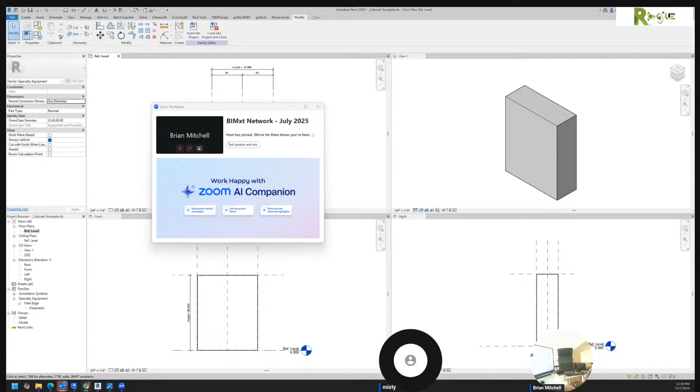I'm actually going to be building a very interesting family. I'm just talking right now before the meeting starts. I don't know if you can see this little tiny wheel right here. They say they're going to let me in whenever they start it, so it must start exactly on time. But after they finish up, we're going to try to build this thing here, which is a rather interesting situation that I think could be very beneficial for us.

Looks like we're starting, recording in progress. Were you able to hear it say recording in progress? I would imagine the two guys with the cameras are who we're going to be hearing. I don't have a way to check the volume, so once they start talking, you've got to tell me if you can hear it or not. I might be able to adjust it a little, but I don't think I can. Let's see what happens, she should probably start talking. So I'll put my thumbs up if I can hear it, okay? If you don't see me, you can just chime in and say I can hear it. Just unmute and say I can hear it when you hear them talking. They're not talking yet.

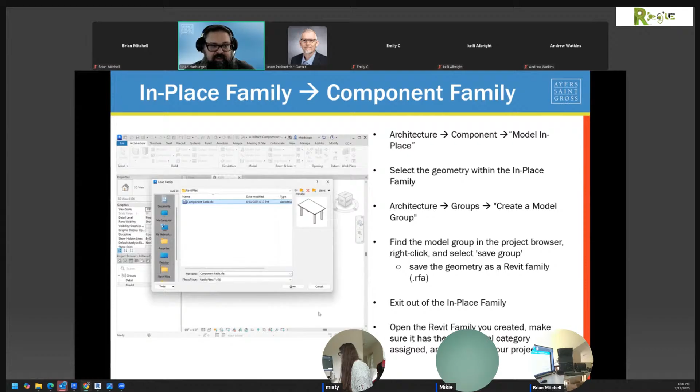So: architecture, component, load a component, component table. And it's going to be identical to the in-place family you made because you copied and pasted the geometry. But unlike the in-place family, you're not creating all these duplicate families in your browser as you move it around, because that's how families work.

So there you go. That's terrible. I can do 10 times better than that. I can't believe that's even a solution.

Families where you have set the family parameter to cut with voids when loaded - we'll cover that. So there's a couple things here to talk about.

We all know that there's wall-hosted families, ceiling-hosted, floor-hosted, and one of the problems with those types of elements is, one, it can only host to one element. So in the example below with this corner window, sure, we can use a curtain wall and approximate a curtain window. But if you're trying to place a product in, like any other window in your building, and you want it to cut multiple walls, a wall-hosted family or a face-hosted family can only cut that one host element.

That's incorrect - you use a work plane based family and set cut with voids when loaded, and you have a void in your family. Anything in the model can then be cut with the void from that family.

So the example I'm going to give here is lights. Most projects have like thousands of these throughout. And every single instance of a can light, if you're doing it ceiling hosted or face hosted, is likely cutting a hole in your ceiling. And that's a ton of extra geometry that you don't really need in your model for most places.

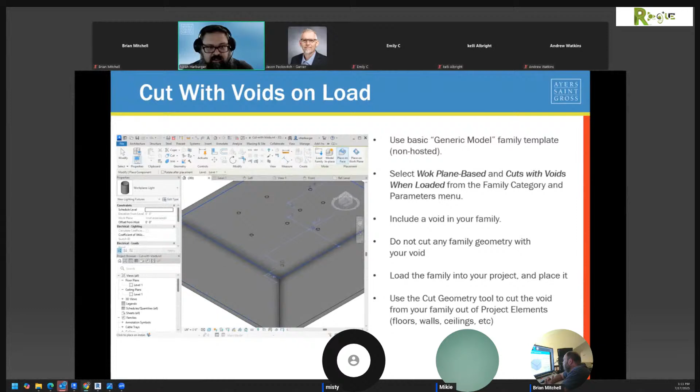So we're going to do the face-based because we want it to move with the ceiling. And you can see here, you're not seeing that white lens of the light in any of these that's being cut, right? If you still, because it's face-based, you could put it in the wall, but we had that always vertical box checked. So that's the difference here.

No, and that doesn't work either. Create a family that can go on any face and adapt. You'll want to check that.

All right, so now we've got... He just told you to do something that absolutely does not work in Revit. So there's no reason there.

But if a few of these are lights that are in a room that we want to render, we want to cut the ceiling. He's doing all this for a rendering, and no one renders in Revit.

Click on the ceiling, click on the light, push this whole library into Twinmotion, and it's going to look like a showroom in place. Why would you care about this for rendering? My goodness, adding this egregious additional geometry.

Of the void cutting - that was the cutting. And he did not need to do cut with voids. That's not what that statement means.

Next thing we're going to talk about is using a material from a project in a family. If you've ever tried to copy something from a project into a family, you always get the error message.

You can't copy content from a project into a family. However, if you make an in-place family, while in edit mode of that family, it treats things there as a family. So create an in-place family.

So why did you make the group earlier? Why didn't you just take that geometry into a generic model that you turned into furniture and had your table on a furniture? Why do you want someone to be in a group? That doesn't make any sense.

Just to be clear, I know you can always add a material parameter to your family to control the material there, but this is for things where you don't want people editing the material. A chair that's always going to have aluminum legs that you want to be aluminum and don't want anybody messing with.

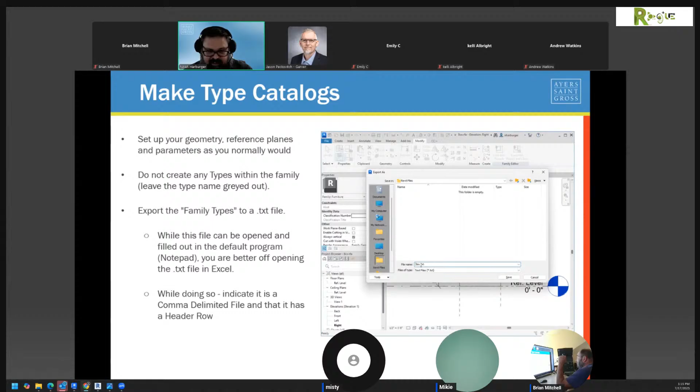So now we can export. This text file is named Box, the same as the family. That's important—it needs to be named the same as the family.

So we have a box.rfa, and there's the box.txt. The TXT file has to be in the same location. Open it—we see a notepad. This is not something I'm going to be trying to edit here.

It's a little complicated. It's a lot easier to open in Excel. You open the TXT file in Excel, and it knows it's a delimited file—there's a character that's separating things.

In the sort of fields we see there's commas. Good idea—and we have headers. So we're going to click My Headers and click commas on the next page, and that will generate an actual spreadsheet we can use.

Oh, it's a beauty. So by default it names that first type the name of the family. We can replace that with whatever type name you want—remember, it's going to duplicate this and create the type just indicative of the dimensions of the box.

He's saying we could have filled all that information in this Excel file, and all those types would be available here in the project through the type catalog. The dimensions right here are in decimal.

We went backwards—we made the family, created the type catalog from it. But his thinking is it's easier to fill that information in here. And it would be, if you think about some of the stuff we did in order to get the values correct.

We just kept going up 2 inches, so you could use the Excel benefit of being able to drag and go 2, 4, 6, 8, 10. We're not going to save it as an Excel spreadsheet—Revit doesn't know how to read an Excel spreadsheet. You have to save it as text.

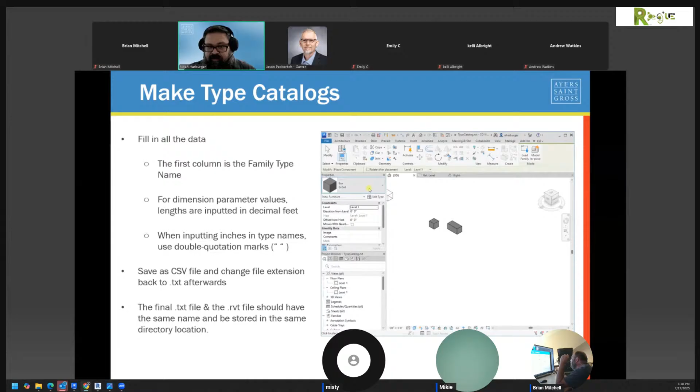No, that's important—you need to load the family directly into the project from its file location. You must hit yes for the overwrite, for the catalog to come up. That way you can pick just the ones you want. Now you've loaded the file, and types that we never created in the family itself are now available, named as we want with the parameter values we want.

Oh, I see a benefit. That's how to use type catalogs and create them. I see a benefit, that's cool.

Next thing we are going to look at are families that can scale. I didn't know you could do that.

Almost every family in Revit has a parameter to determine how tall the family is. But just adjusting that parameter is not going to scale the family.

These are the planting families. If you have a family that you want to have a variety of sizes for, but you want it scaled proportionally, you can utilize the one family template that has this functionality, and that's the planting template.

All right, teach me something. So here, I create a really new family using the planting family template, and we're going to be saving this, whatever the family is.

I'm using this example as a board game piece, a meeple. So I'm going to call this Meeple Subnest. We're calling it subnest because we're going to have to do it twice.

That's a family that's nested into that, and this family here sub-nested into the original nested family.

I'm adding a material parameter here, but really this is just an extrusion that I'm pasting in that I pre-made of this extrusion here. Oh, you dirty dog, that was a nice trick.

6 inches front, and when I dimension it, I see okay, it's 3'6" tall. Now I'm not going to use this and turn it into a parameter, I'm going to just say height is 3'6".

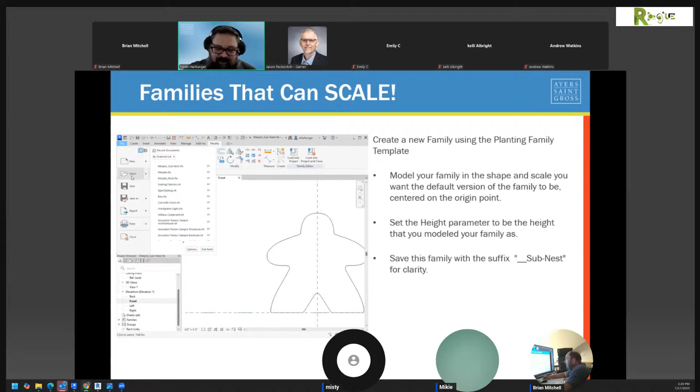I will prove that. I can load that into the Meeple Nest family, another planting family, a planting template. You got to have a planting inside of a planting.

And guess what it just did when you did that? It bloated the file. But this is what I was showing you, how to make pumps and things like that, where you just want a bigger pump, no one cares what the actual pump is. It's very beneficial, however it does make the file size go up.

So we select this and you have to do this double nesting, which you know me, you think I got good skills. It tripped me up for 8 hours on Tuesday, made me want to quit doing Revit. The fact that you had to put a planting family inside of a planting family.

I don't know if you caught this, I forgot to change the 19 to a 3'6".

So when we finally create our first main family, the last step is to create a new family. It could be any family template you want. We're just going to do generic model here, but we're going to then bring Meeple Nest into it. So now you've got a triple nested family.

Yeah, good luck, I can't handle triple nesting. All of these are getting patched together, the parameters are getting linked together.

You see here, it came in really big because I hadn't changed that 19-foot thing. So I'm changing 19 feet to 3'6" here, and it shrinks down.

Show us that in 3D because it is a cool trick. Material, I create a material parameter here, so the Meeple family has a material property parameter and a height parameter, and both of them are mapped to their nested families.

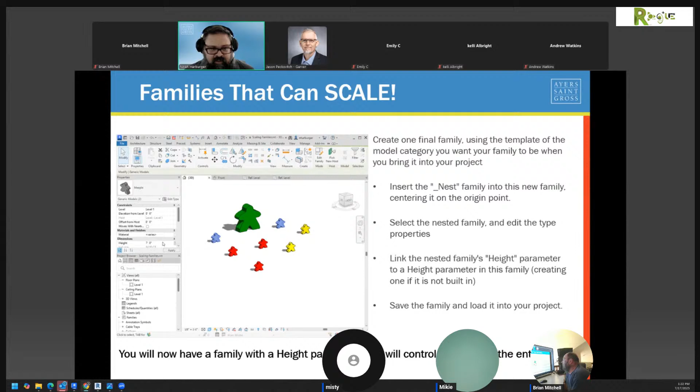And so we can see, this isn't about types. We don't have a 3'6" one and a 7-foot one. Please save that family and tell me what the size of that family was, and you can see the depth is changing, the whole thing is growing proportionally.

Make those little tiny ones.

There you go, that's how you make a scaling family. 8 years ago, dude, I was tickled too.

Let's talk about complex geometry. We all know about flexing geometry in place before you start building the geometry. You want your reference planes and dimensions to all work, and you want to be able to move these around and see that nothing's breaking.

But just because you can flex geometry in place doesn't mean you can move entire pieces of geometry from one location to another without weird things happening. You can see that top shade is growing and shrinking - it's not how we intended it to be, it's not what we want. We really just want that entire head of the pendant to move.

So that's not good. So what we're going to do is use a nested family. Let's take all the geometry from that pendant head you modeled, copy it, and paste it into a separate family. From here on out, we're talking nested families a lot.

Just heads up, nested families are where it's at. That's why we're here, baby. So we're just placing this here.

We don't need to parameterize anything other than the material of the pendant itself. It's one size fits all - you don't need to grow this. This is something a manufacturer sells, so this is what it comes like.

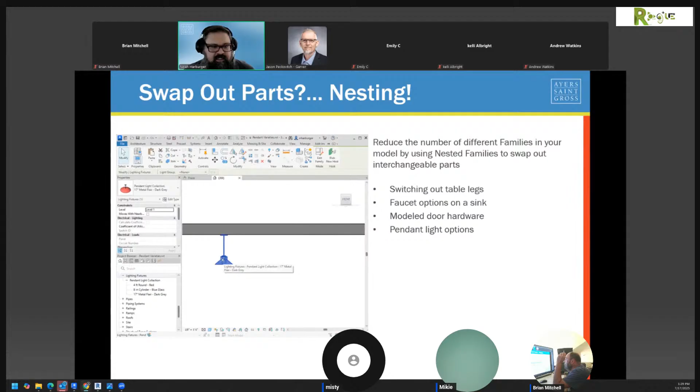So we can delete these one at a time - you can't delete multiple apparently. Delete those, and then we can copy the new family we created, that is the pendant light collection, and make 3 instances of this. Show us the file size of it - the types look completely different from one another. You've got to show them if you're over a meg.

All right, so the last thing we're going to be talking about as far as nesting is bidirectional arrays. Now there may be other uses for this type of family - mine always goes to seating layouts. If you try to make an array of an array within a single family, you're going to have a bad time, because of how arrays, when they are parameterized, rely on model groups. So to solve this problem, we're using nested families.

This was definitely worth attending. That's the cubbies that I need to make after this.

We're going to take a chair family - just make sure there's a left, right, back, front reference plane in the family - and we're going to load it into another family. We're going to call this Seating X Array, because this family is just controlling the array along the X axis. We think we can do better placing than that. We're going to be testing that with our cubbies.

Locking it to the left position, and the front of the seat to the front position. We have a row depth defined, so that we'll be able to space these out with other chairs later. But right now, we just need to make our array. We're going to do a linear array, and we're going to move it to the last position, because we want the right side of this to align with the right edge that we're defining.

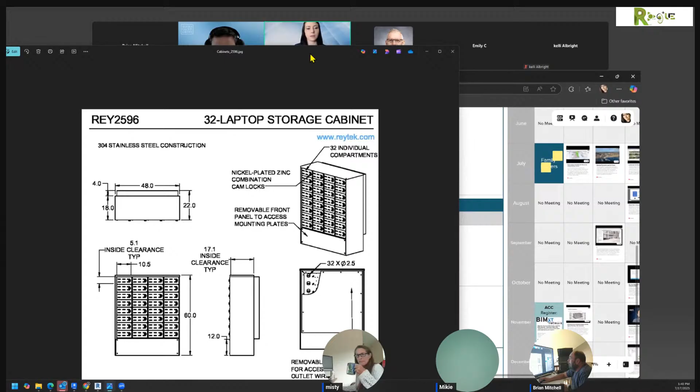How long would it take you to make that with your skills, typically, to make a family? If your buddy walked in and threw that submittal on your desk, how long is it gonna take you to build that? Just a simple family, about an hour.

So what about you, Misty? You'll definitely have an interesting perspective, with different ways of hosting and things like that. Less than an hour, I'm a little tired today, we'll do that this evening after work.

Yeah, I just have to make it look like that, right? You just have to make it look like that.

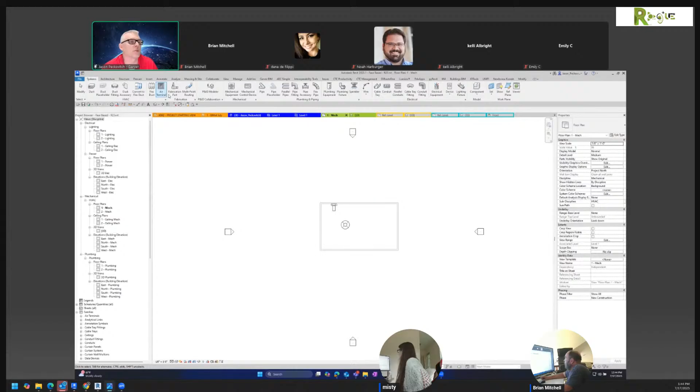My dialogues tend to get messed up when I switch from my only laptop to having my monitors connected, and even with Windows 11, it doesn't resize everything. Anyway, all right, so no, that's Autodesk.

I loaded that stuff. So what you're going to come in here and do is you're going to copy monitor these things, under collaborate, copy monitor, and select the link. And you can only do that if you have a central file.

Copy that one. This makes the family live in your project. Oh, and it starts kicking out errors. That's always a fun thing. Copy that again.

That's the step I forgot. You have to make it a central file, so then you can copy monitor the project. So you have to create the hosted object. I can do that.

Oh, I'm psyched, that was a good one. So copy the light fixture. And since we can see the receptacle, we'll just copy it from here too. We're gonna hit finish. Now, if we go to edit family, make sure I don't have that open anymore.

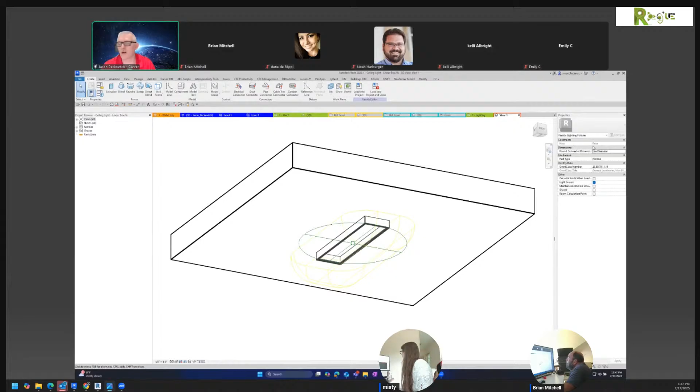Additionally, when you take harvested families and create a wall-based family into a face-based family, it will become a vertical family. It'll be laying on its back as opposed to horizontal.

Back before 2022, lighting fixtures couldn't use a nested annotation in the fixture because it didn't have that maintain annotation orientation checkbox. They fixed that in '22. So in prior years, a lot of my content was 2016, 2018, even 2021, so I had created a vertical version of lighting fixtures so I could nest an annotation in that. Now that's not really important anymore because of that maintain annotation orientation checkbox.

But if you wanted to make a specific vertical-based family, you could use this method to convert a wall base into a vertical base. I did this a long time ago, and Brian Mackey took it a step further, took that vertical family, purged out all the parameters, and made it into a template file so you could make families using that template file.

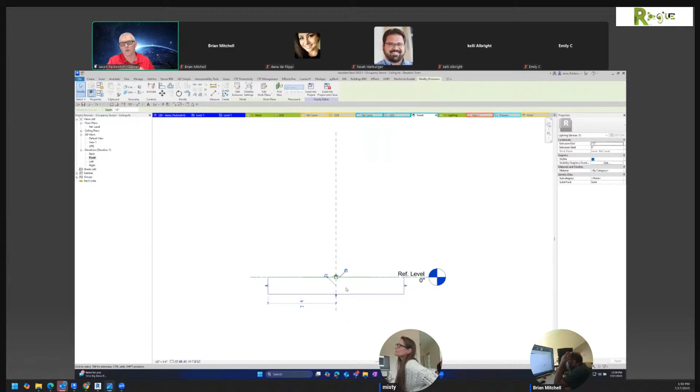All right, so we're going to go to the host that's hosted. So on the family you want, like the roof hydrant, it's always going to be vertical, and it's face hosted, but you want them with a host -- this works for both families. It can be as simple as just taking that host and moving it up to the reference plane or reference level. Remove your constraints. It's going to tell you extrusion too thin, but that doesn't really do much. Just delete it, and now your family no longer has a host.

When it comes to something hosted to a ceiling, because this is a simple family, I can just mirror it because you want it to be -- you're putting it in the ceiling or above, and you want it to look correct. So you just mirror it, and now when you place it, it's going to look correctly.

Now when you get into more complicated families, like maybe an air terminal or something with a lot of geometry and a lot of dimensions, mirroring it is not going to be as simple. In some cases it might be better to just model that stuff from scratch rather than rotate it and try to replicate all the dimensions and strings of that, but you can remove those.

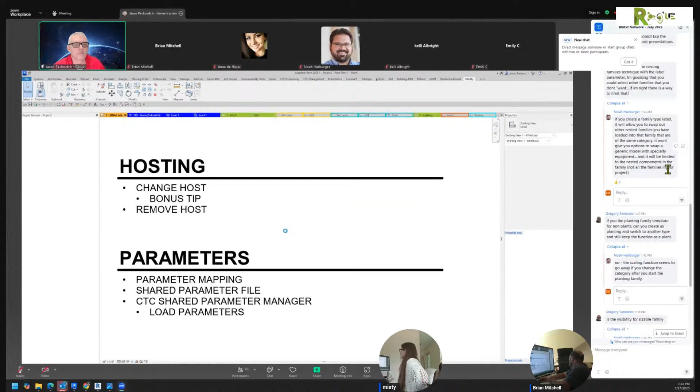All right, so then I'm going to load in a family. I'm just going to go find this pump family that I recently worked on, but I'm going to start from scratch.

Sometimes these families, like Noah was talking about, have type catalogs. So if you load it into a project, whether it's this new project or a different project, it'll let you select those types you want to load. If you just open the family to edit it, it's not going to have any of those types.

I'm pretty sure this one has a type catalog, which has a ton of types. So when I'm creating a standard family, with the amount of types that I have here, I would limit it to say one per size change, and then make the changing information instance-based parameters so that the team can change that information on the fly for that type.

It's like the electrical data may change, even if the family size is the same. So just to have one or two types, I'm going to do a 1.5, a 2x2, a 4x4, and a 5x5. So now those types are going to come into my project, and then I can edit the family to start mapping parameters.

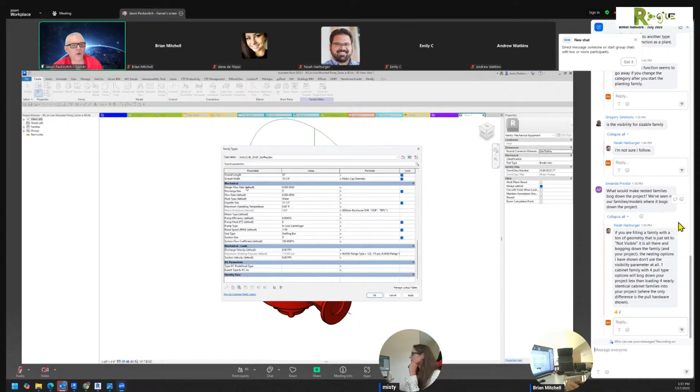I get a lot of questions about, hey, can we just make sure that some of these parameters have information so that the schedules look like they're populated when the family's going through. So, as I go through all that, I'll map it, and then I use a tool called Shared Parameter Manager.

Oh, that's the wrong one. Shared Parameter Manager from CTC, the BIM Project Suite from CTC, is a little pricey. I think it's $1,500 a seat or something, but I think it's well worth it if you're doing this a lot. I tried the Diroots one, and I couldn't wrap my head around it to get it to do what I wanted it to do. So I've been sticking to this one.

So with your shared parameter file, you browse to it. Again, I'm doing this a lot, so it'll automatically find that location. I just open it. Here in this window, you can add, modify your parameters, delete parameters, regroup them, whatever. But the gem of this tool is that once this is loaded... working off VPN, I guess.

Once that is loaded, there's this tab called Load Shared Parameters. So what this does is you create a selection set of the parameters that you want to add, and then you can save it, and then you can load those parameters into a feature family. So once I have this open in this dialog or tab, I can come over here and just hit Open Master, and you don't have to map to it, it just opens it because it's open in the other tab. And so on the left here, you'll get all the parameters that you have in the file, and in the center area is where your selection set happens.

Now, it does require us to be a little bit intelligent in how we build that family. But my thought process is I've been struggling so bad and complaining the last three days with the fact that the families are laying on their back, and it makes it so hard to understand it. So let's see if we can do what they wanted us to do.

So what they wanted us to do, all I should really have to do to make that family - because there is, what he said was, there's no family template provided. Brian Mackey realized there was no family template provided, and they still, probably seven years later, have not added that template. That's reprehensible, that a user solves the problem and the software doesn't.

So what we need to do is - this was all about the fact that it was a central file. So if you're not familiar with central files, I'd be surprised, because most everyone's probably working on the cloud. So that should be no problem for the average person. But what we want to do is we want to build a file

that's got a wall in it, right? A copy monitor is the trick.

So we would need a face-based family. And probably the easiest face-based family you're going to find - they probably have included it in here. Nope, they do not have any plumbing fixtures.

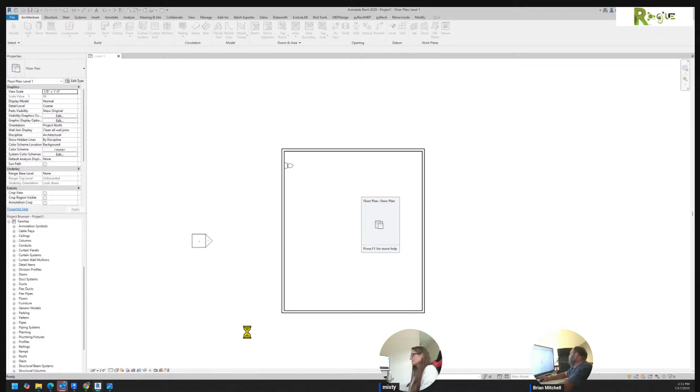And this is going to be the architecture. Okay, now that has saved that as a file. To make that a central file, all we do is go to collaborate and activate the work sets.

Okay, by putting any - and now I'm not going to go deep into creating work sets, hopefully you've got enough experience. This now, when it gets saved, it becomes a central file. You'll see the save button is going to go away, and it's going to turn into a synchronize with model.

All right, so all he's saying you have to do is make another file. You need to link that file in. Where's my link? Way over there. And there's that architectural file.

What he's saying, all you have to do is collaborate, copy monitor, select link.

Now what? Copy. And that guy is now copy monitored. Now what he said you have to do is just edit this family.

Son of a gun. And what it did - that's beyond unbelievable, because when we're building these cabinet doors, what we want to do is be able to put symbology in them, opening arrows, things that are going to scale with the scale of the drawing. This is going to allow us to do that.

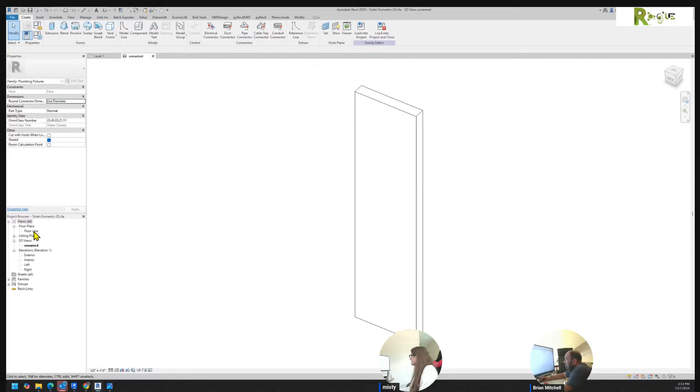I cannot believe that. So if I go to the floor plan, that really needs to be named reference level. I hate when they do that - a little inside information. Make sure you turn everything on or you're not going to see it. Most importantly, those reference planes, which is the reason I say that's so doggone important.

Now, it does bring in a little bit of a caveat. See, the hope is that this is not a wall, but this is instead considered a plumbing fixture. That means it's face-based. I forget where he saw it was face.

Right here, he saw - see that face-based right there? That's the whole key. All right. Now, that means that I'm going to have to draw this thing backwards, which is not going to be acceptable for me.

So what I want to know is, can I delete this? But there's no plane out there. So how does it end up coming in?

So what I want to know is, if I create an extrusion - actually, let's just do it. Let's make sure there's no parameters left behind. There's a bunch. Those are all the connections. Those are only coming in because this is a plumbing fixture.

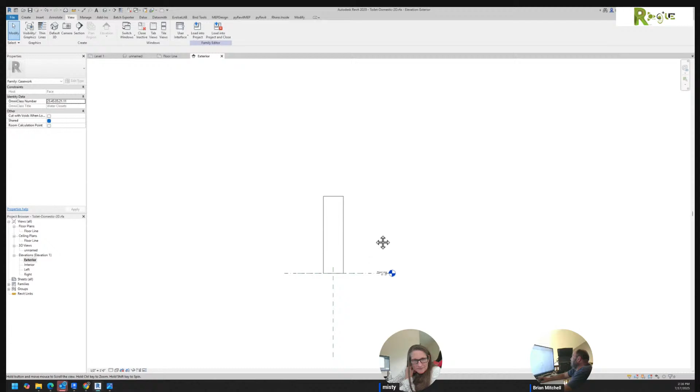So we have to figure that out because these need to be renamed to front, back.

All right, so if that's the case, let's get out of this. We can get out of that. We no longer need that. We got to rename these views. That's a little bit annoying, guys. I'm not going to lie to you.

And it doesn't even have a center justification here. So I wonder how much McKee cleaned that thing up, to be honest with you. What is the name of this reference plane? All right.

We don't need anything that tall. We're going to be down here around this height. All right. So if we have an exterior view, if we have a right view, an exterior view, and a floor plan. All right.

Heck, I will create a 3D view because I know it can create a 3D view. And I'm just going to get rid of this other guy altogether. Can I delete him? Nope. Can't delete him. He has to stay. Isn't that funny?

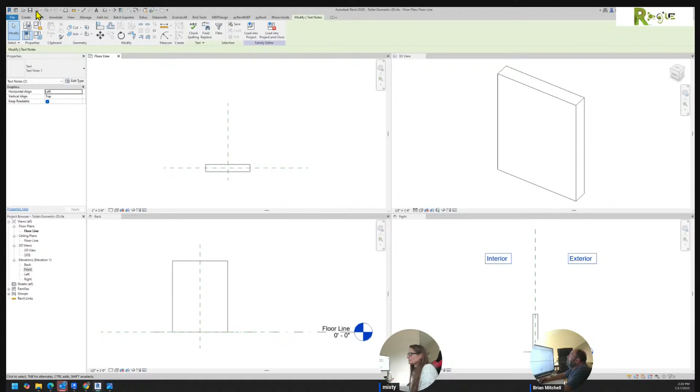Now I'm liking it. Now we no longer need these images. And we would find that this back view, if we created, we'll need an extrusion that has some kind of taper. So we can make sure that our orientations are right. Finish. Yep. And let's stretch that height a little bit.

All right, see, so there's the first thing, is this view is always going to be showing in the back. And I forget how to change that. But I know that can be changed where we want to typically be looking at this from this view, right? So we can see that this is going to the front. So if this was truly the front view, we would see the thin piece as opposed to us seeing the thick piece. So if we went to the front view,

All right, that's great. So now what I want to do is I want to take this guy and I want to put him right. Let's keep him on the weird face that he thinks he's going to go on. Okay.

That's weird that it's weird that it snapped to this edge, snaps to the reference plane, but won't snap to this back edge. That leads me to believe this could actually work very good.

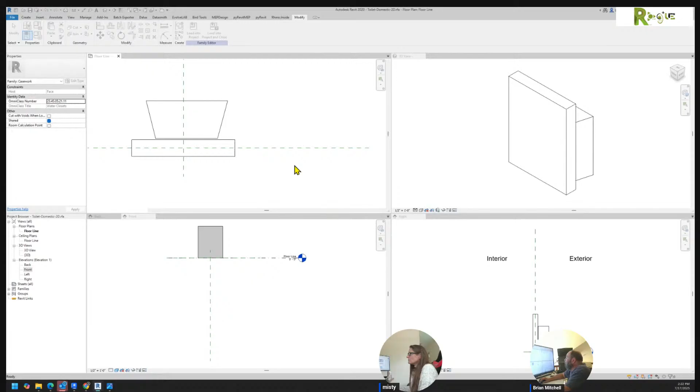Started a project fresh. When's the last time you started a fresh project? I would imagine it's been a while. Load into project.

Look at that. It is placing it by that back exterior edge, which I can't control, right? That's just being held off just a little bit. Right?

Can you do an align? You can't even do an align to it. Can you edit it from the back view? All right. All right. Maybe we have a solution. No.

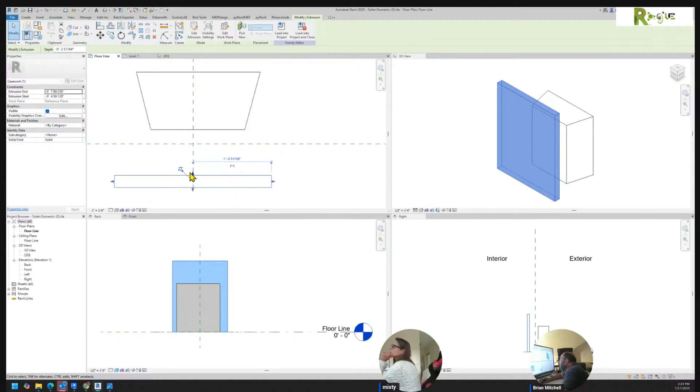So what my crazy idea is if you reverse this and you load that into the project, those things should all either flip in and be inside the house now. The question becomes how far inside the house.

Now, see this, I can drag that to there and I can, oh, what reference plane is that thing on?

Maybe that's the solution. This guy doesn't have a name, right? And he would typically be, we're going to call that the front. And call that the front. Nope. Control C, Control V.

All right. So then we can say, edit this guy's work plane. He should already be on front, but we're going to put him on front. All right.

So now what happens is if we put the start at 0, and we put this at 8 inches, now we could get to that location, right? But I'm once again just going to push it to there. I want to know if it's going to that back object or the front object.

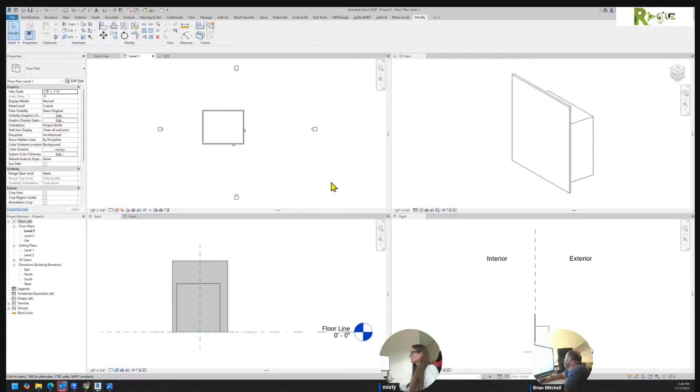So if we say that this is 1 inch and this is 0, now you'll see I can stretch this right and snap it into that place and load it into the project. And go to the 3D, and they should all be snapped right on and of that length. All right. The big part is to the outside.

If I take this guy and say this is a -1, that should theoretically mirror the whole situation. So now you're going to see if I load that into the project, I'm going to bet that that flipped it around, right, and flush to the face. So that means that now I can build on this side.

This is so awesome. This worked. This is so awesome, all right.

So now I would probably set this as minus... you know, 1 inch isn't bad. So now what I want to know, and this is the crazy part, okay? If I go in the front view and I draw myself a box... oh gosh, I'm so excited.

Only thing I want to check is I want to make sure that's not going to that imaginary reference level. What level is it? It says work plane not associated. So what I need to do is go to my front view and set front.

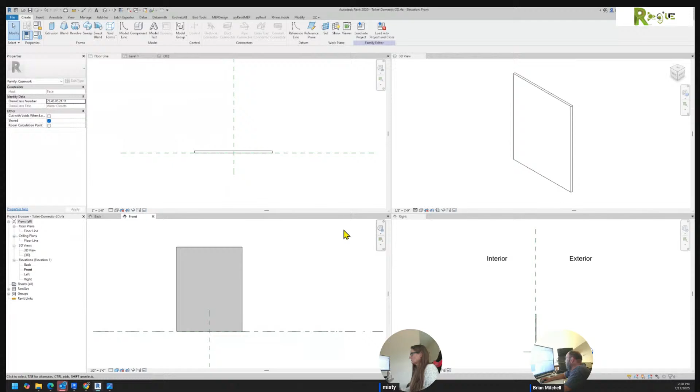This is the center left right, which that named good. Control V, we're going to make that one center left right. All right.

To be honest with you, we're going to create a reference plane. I think about 1 foot's a good start. Here and here. This is going to be my left. It's always a good idea to name them so we can host stuff to them. And this is going to be my right. Control C, Control V. All right.

What happens if I do that and I do maximize 3D extents? That's not really what I wanted. All right, we'll get an extrusion in there before we clean up our reference.

We no longer need this... and that. And you can't delete them. That's too funny. That's too funny. All right.

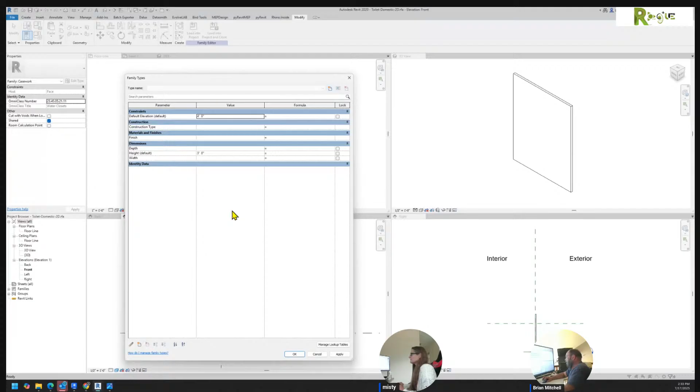It's where the families are so, they were never really refined. And I don't think anyone ever really figured out exactly how they work, because there's been so limited improvement in families in a decade and a half. Okay, but either rate, I want to show that I can take... that's the height.

Since most of my work is going to be done in this front view, I'm going to go ahead and just do my dimensions right there. That should be an equal.

This will become my width. Or I'm sorry, yeah, my width, which correlates to the length for this particular manufacturer's designation. All right.

Then the depth one—yeah, I think the depth one's important. I'm actually going to make my depth a little bit longer, create a reference plane.

So you see in this one, I don't see a reason to do the depth part. I have the front, that makes this the back. And you'll see I change it both here and then in the designation, because that's the only way you could host things to it, is if the reference plane is named. The other's telling us that it's the front of the object.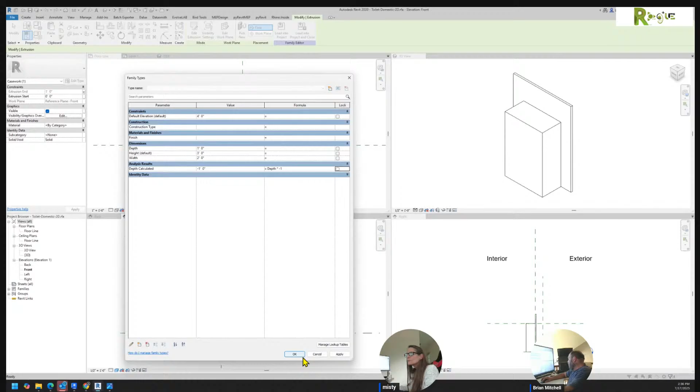That one I'm going to make as an analysis, because I'm going to actually write a formula in it. The reason I did that is because I want this thing to be actually extruded the inverse of the depth. So I'm going to just put this guy's formula as the depth times negative 1. And what we would see is now that guy would extrude into that wall.

Why did I do that? I did that because now I've got this fully parametric. Let's just make all of those parameters instances just to reinforce, right? So if we go to the parameters, you're going to see right here that the height only has the word default. That means it's an instance parameter.

Okay, we're going to fix that. Let's try to fix it here, go to edit and go here. Oh no, I can't change it to instance. Look, click, click, click, click. No, please, come on. Okay, so it won't let you do it. Here's what you got to do: you just have to switch to another category.

Let's go to air terminals this time, just to prove to you that it really doesn't matter. Now go to your parameters. Now see, air terminals added these other little things, not depth calculated, that was me, but it added the min flow, max flow. Every family has a little bit different what it provides. But you see, when I'm not in there, I can make that an instance. I can make this one an instance.

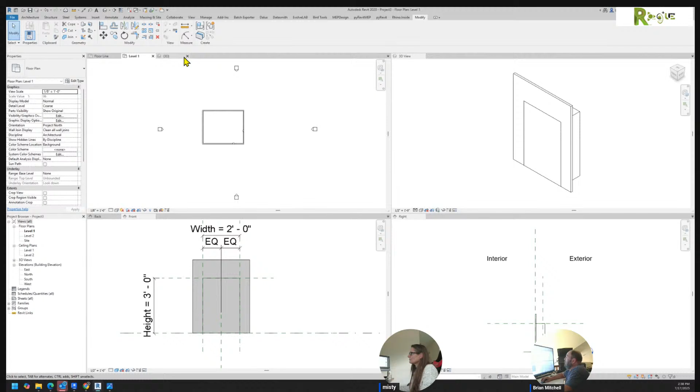So what happens now is if I load this into the project and overwrite the existing and went to the 3D, what you should see is... oh, I know why. Because I didn't do the cut part. That's where I take this thing here and I turn this into a void, and then I cut that face object with that cutting object. And what's happened now is I've made a little thing that will cut holes, right?

However, since all of those are instance parameters, I could come to this one here and say this is 2 by 2 by 2. And I could come down here to calculated. So what happens is I have that calculated one as a formula. Let me go change it for a second just to show you how neat this is. Okay, so we just are going to take that equation off.

Control X. Load that into the project. I hate that it always switches back to the view you edited the family from. All right, so now what happens is we'll see that that depth, I could make that be minus 0.5 inches. Oh, that was a little bit longer. See this one here? I can say minus 1 inch. And I've now got an object that can cut holes in there.

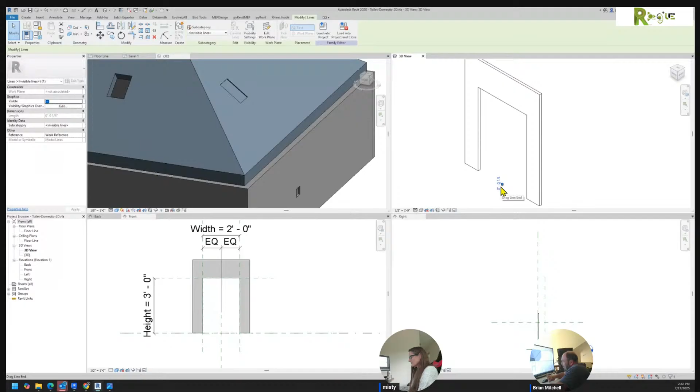What is this thing here? Invisible line. Wonder why there was an invisible line in there. Somebody put a little invisible line in that toilet so that it would hit a cutting plane. That's what that was there for. That was sneaky.

So what we need to make is a cubby. Sort of interesting - we can repeat everything that we've done.

If I go - see, if you change this to doors, I think it adds rough height and rough width. See all that extra stuff? I don't want that. It also adds all of that. So we're going to leave this as casework.

It was really hard for me to decide which one of these to pick for a long time, but I'm now beginning to understand what I want to pick it for. So let's just make the simplest thing.

Let me put that one equation back to here, and I'm going to actually fix that equation because I want that to cut into my box, and then I want it to leave a half inch plus 0.5 inches. Okay, that's so my millwork box will work.

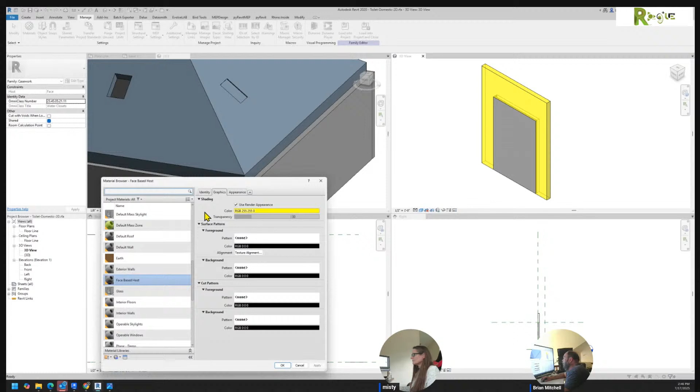And me personally, I think we could give this a heck of a lot more transparency, so you barely know it's there. But understand, when you're in shaded view or hidden view, you can't see through objects that have transparency on, which is ironically the next thing that we're going to draw.

Okay, next thing that we're going to draw is going to be create, annotate symbolic lines. What the heck are symbolic lines? We'd like a hidden line projection that's underneath casework. So in the project, that's what it would say.

Now, I think we're going to go with this methodology, right? Now, I can tell you that that guy is going to fail if I try to flex my model. This is just by many years of experience.

And what I know I need to do is I need a dimension from here to there to this one, not that level line, but the reference plane line. And then I tell that thing that it's equal. And I'll be honest with you, I think I can now flex my model.

So let's try it. Here we go. We're going to go with 2 and 1. And you'll see that that swing line went with it.

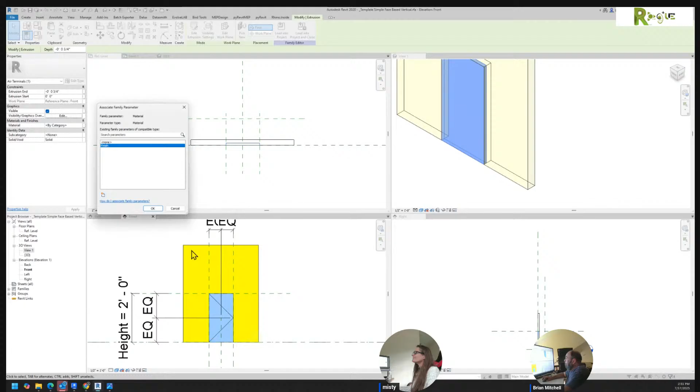We should be able to pick this object, say it's got a parameter on it that's a finish. Do I want that to be by instance? No, we want that to be by type. That's a question you always have to ask yourself.

Now here's where the amazing is. We go back in here and this casework - I want to see how it handled the word finish. Uh-huh, you see what it did there? Check that out.

What it did was it created a new finish with an underbar X behind it. You're going to find that the structural does that a lot of times.

If you try to rename the length or some of the parameters that are default in it, if you try to make them - because what I wanted to be able to do was potentially make that parameter by instance, but you're not going to be able to do that. So it means I'm going to end up with this extra material in all of my families. That's not the end of the day. Okay, what I'll actually end up doing is I'll end up renaming this guy.

And I typically name it main, and then accessories or those kinds of things, because it's the material. You don't want to name it wood because it's going to be a wood door, but then you want a metal door, and now you're assigning metal to wood - that doesn't make any sense. So I've been calling it the main. Maybe I could come up with something better, but as of right now, I've got something that works pretty good.

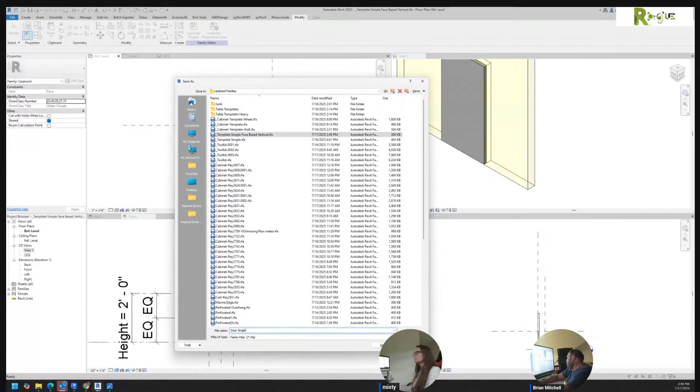Now, if we take and go into our other project, we take that door single. Let me see if I can find it. And we drag and drop it in. You'll notice that when I put it into a family, I have to actually then load it into the family, which is very, very frustrating.

You'll notice that I have the ability to hit the space bar. No, I do not have the ability to hit the space bar. Why not? Oh, wait a second. Well, maybe it did. No, the space bar is not working.

So what we'd find is that thing didn't just put a door in, okay? You'll notice up here, it put the door in. It actually shows me that I forgot to take this. And now we could load that into the project and that would be linked.

And you see what's happening here is now I have the ability to say only open that door 45 degrees. And since this is millwork, I'm only trying to show those. So to be honest with you, you could probably say only show this visibility in my fine detail. Or is it if the object's cut?

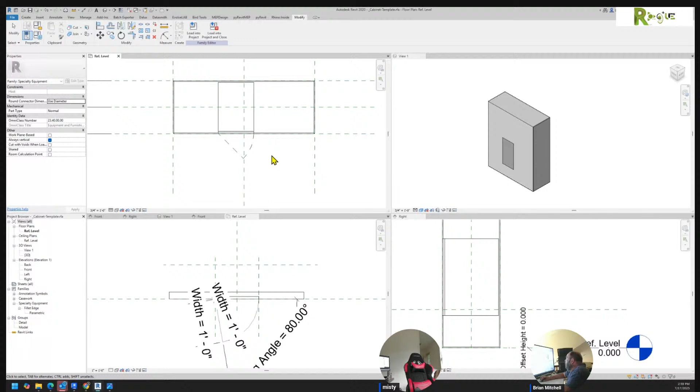Load that into the project. And you would like to think that there should be a little plus symbol right there, but it's broken.

Might not be the end of the day if we come here and make the test be an instance parameter. Good gracious, you got to play with a lot of stuff because, I'll be honest, there's just too much stuff that's broken. And I really don't think I'm the only one that thinks that way.

Now there should be a material over here. And look, now I can link it to the main. And that was the one that was named test. So we can come over here. Oh, this one. We could get rid of this guy, Control C.

Let's take that and delete it. Take this guy, make that be named main. Pick on the actual object and make that material be the main.

Love how you can apply it to the finish. That's pretty cool. And now we can make that material be equal to main. And the two materials should match.

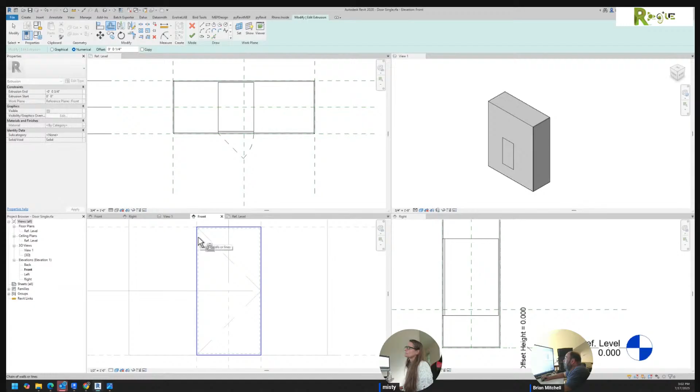If we offset a quarter inch, finished, and loaded that into our project, you would now see we've got a little tiny gap all the way around. At this point, I'm done with that family. Sure, I'll save those changes.

Now, this gets us to our problem here. How do we make this?

And that's where I wonder if those instance parameters are going to hurt us. Well, we can do it twice.

So the idea is, and I actually like what they've done. All right, so he did an array. Now, me personally, my recommendation is when you do that array, yes, absolutely use last, but I don't ever like to make that thing go where it belongs. All right, so that's the first sign right there is, can it array itself? And it does appear to have arrayed. Now, this is really important because I needed to know that it was going to cut that object, and it did indeed cut that object.

So that means now all we would have to do is align this to that and lock it. Align this one to this and lock it. Align this one to the bottom and lock it. You see now that thing is constrained. Okay.

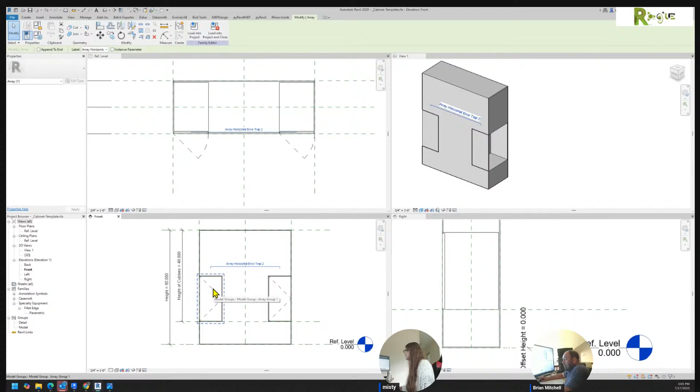And we say, okay. Now, if we go into this family, right, we should be able to pick this door, and we should be able to say that this is a 12-inch by 12-inch. When we finish, the other one should be made the same way.

Okay, that's a very important concept, because what we've got to be able to do is we've got to be able to say, we pick that the width is equal to the cubby width. Now, I don't recommend that we're going to put that in dimensions. We're going to put that in the analysis results, because that's where I'm going to run all of my formulas.

Okay? So if we know that one, we know as well that this one should probably be, and what did I call it? Cubby width. We'll call this cubby height. The last couple of days, I've really been playing with naming it height and then cubby. But let's just go with that. I don't want to get sidetracked, because I don't even know if this is going to work. All right.

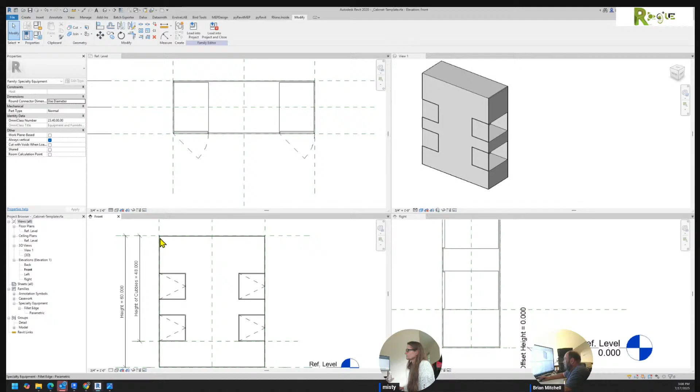That makes sense. So what I need to do right now is I need to hide some objects. Otherwise, I'll be picking the wrong object. All right. There's probably still a couple objects here. Nope. Didn't grab anything, did it? Doesn't think they're there. All right.

So instead of doing what you would think, you want to move from this reference plane up to here. And this is why most people would think this doesn't work. Now let's see if I can do that.

All right. So now the question becomes, could I make my array be a 3 by 3? Let's see, this array, I wanted that to be in the analysis results. We're not worried about that right now. Remember, see, we're going to typically hide that. So what I'd like to do is I'd like to know, can I go a 3 by 3 array, please? Nope. Nope. Nope. Nope. Okay.

So I have a belief of how I can make that work. Okay. And it goes like this. We have to edit one of those cubbies. So why don't we just put a brand new one in? How about that? Right over here, here's a casework. This should really be named cubby. I want to put this single door in.

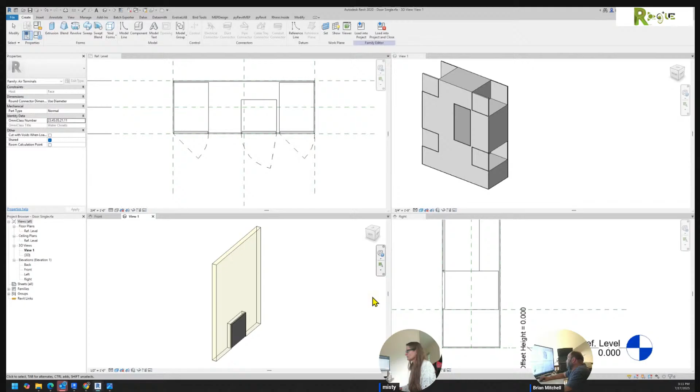What we want to do is we want to edit this. What we want to do is make it a 1 by 1 cubby. And remember, I'm going to have to fix all my symbolic lines, which is a real pain in the butt. But I had to do this because I believe making these instance parameters, which I was just trying to show you how that worked, I think that's causing the problem. We'll find out.

And load that into the project. All right, now what happens is you'll notice it held all those sizes. It did what I needed it to do. The array can work, but oh, you dirty dog.

Well, it can work. It just can't work with that family that started from that vertical hosted object. So that vertical hosted object, there's some other problem there. And what I mean by that is you'll notice here, I don't have a depth, width, and height. Oh, man.

Utter disappointment. I can't even tell you how disappointing. Probably about as much disappointment as I am actually excited, because I still think this can be done. I just don't think it can be done with that family that would have made things a lot easier. Okay, so what I'm going to do is I'm going to play a little bit of a trick.

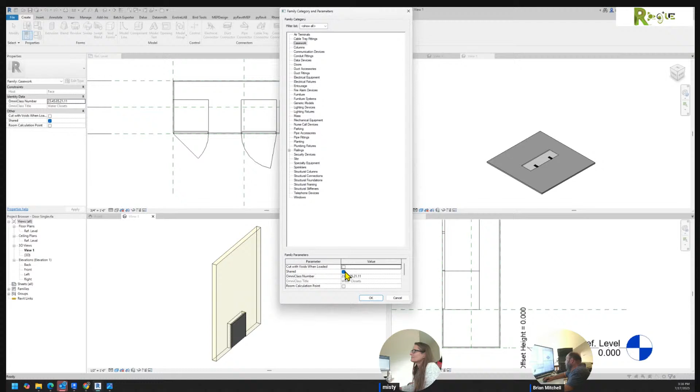Now watch what happens when I double click on this. We go back to my good one. And what happened was right here, it's checked on to be shared. And that's why it won't let me name it. Now, when I try to do this, it says you can't do that.

So this is where what I'm going to do is I'm going to go back to him and I'm going to name this blah, blah, blah, or gibberish to know he's bad, right? Now I could load this into the cabinet template. Perfect. We want to put one of those guys in on this face.

Right? Were we able to hit the space bar? No, it doesn't like the space bar. That I still would like to figure out, but we can solve that problem by going like this and rotating it, okay?

So the idea is if you went into this array -- you can't actually go into the second array, can you? If you went into this array, yeah, I think it's going to lose all of my locks.

I think it's going to lose all of my locks. So my question would be, probably just as easy to go delete these two arrays. We have all those parameters still in there. We just need to lock this stuff down again, right? But what we're after is, can we

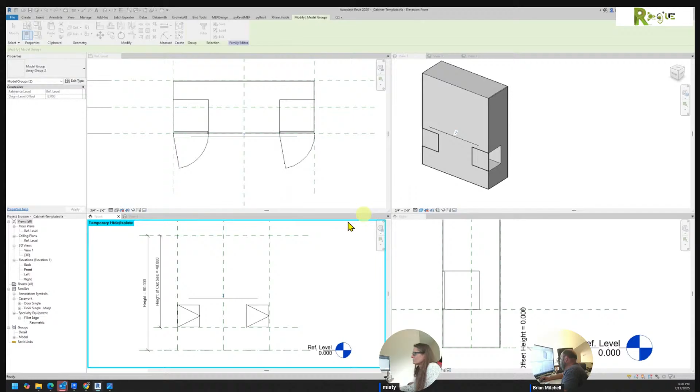But at any rate, if we now, let's see, we take that, right? And that guy's all locked down. And we said we didn't care about that. We really like to do this at a little bit of an angle, right? The reason being is that we have to lock this to the top and this to this edge.

Now that should allow a bidirectional array, even though they said it couldn't be done in that meeting we were just in. Let's see, this error trap, that actually goes to analysis. I guess it didn't hold that. Say, okay, oh, because I made a new one, that's why.

All right, so now what we should be able to do is we should be able to do a 3x3 array. And it's not going to do it. Oh, but I didn't even link those, did I? This is the— maybe that was why. This is the array vertical.

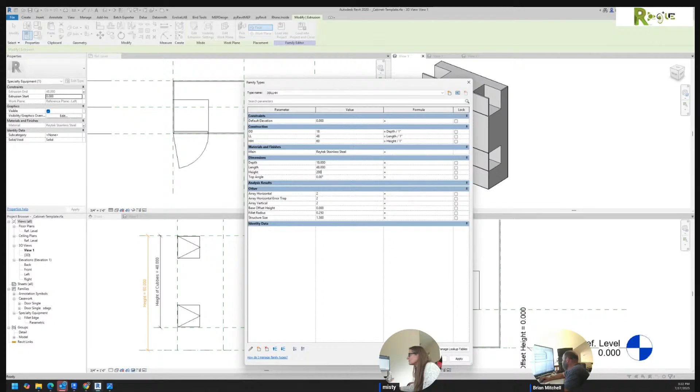All right, so if that's the case, let's take this thing and let's say make this guy be super high. That's going to be by taking the height. This actually needs to go down to analysis, but he might be correct. We'll see—go 200 feet, 200 inches. That'll be a nice tall one. Okay.

Now we can pull this down. No, we cannot. Height of cubbies—let's make the height of cubbies and see what that does. Oh, you know what, I did that in dimensions. That's something I want to change. What I want to do though is I want to put that down right after the height. And the height of the cubbies is 150. Okay, yeah.

It does not like them. Well, let's try just nursing it in, because I've noticed that does help. Cubby height—oh, height of cubbies, 60. Nope, it was 48, let's go 52. It does not look like it, does it?

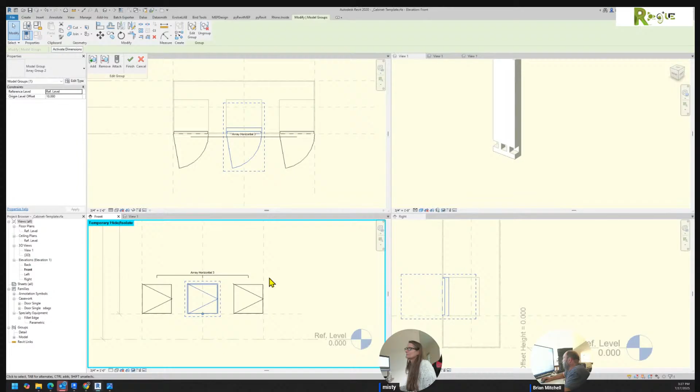If we put in one of these cubbies up here above, we do have it linked. What do we have it linked to? The cubby height and the cubby width. I bet you any money.

That's where it's at. 4 minus 1 just happens to be what we got to do for the number. Actually, what you want to do is this - you don't even want it limited that hard. What you wanted to do is say the array horizontal, Control C,

Control V, which is 16. Now it's going to remove those constraints. Let's see what it actually did. All right, I can live with that because I think you can find this alignment.

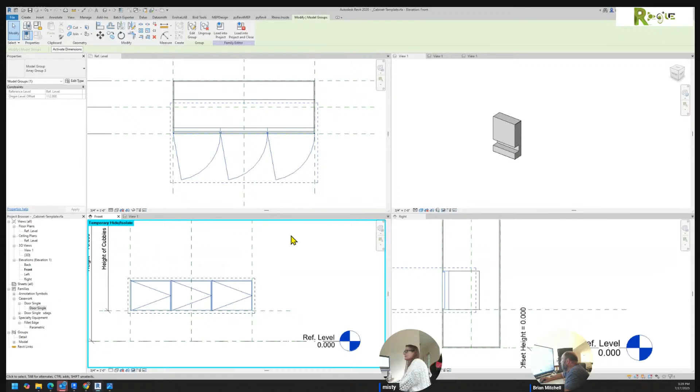Remove constraint. All right, so this is that time when I told you that what you have to do is move this guy over to here, and then hopefully align there.

And then if we have any luck at all, if we put 4 cubbies in, this thing will work. Nope. Can't hang on to it. What if I try to align? Why does it want to move the 2?

You can live with that. We make the cutting object one big object, and then we just fill the doors. As a second, that's 3 nested objects - you don't like to do that.

Well, I'd like to try this guy again. And I'll be honest with you, that family I didn't really do any work in.

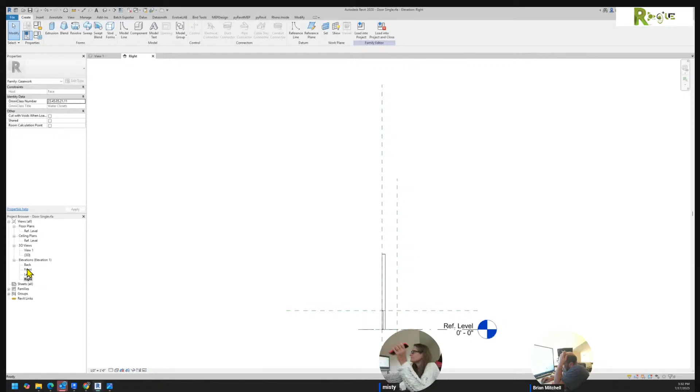All right, all right, I think I understand what I'm doing here. Let's change these 2 doors - that and that - go to hidden lines projection. These 2 go to hidden lines projection as well. Reason these aren't showing their style is because we're not in fine mode, just in case you were wondering.

All of this stuff here, I'd probably change this scale to more like 1.5. Those scales are a little bit more reasonable. All right.

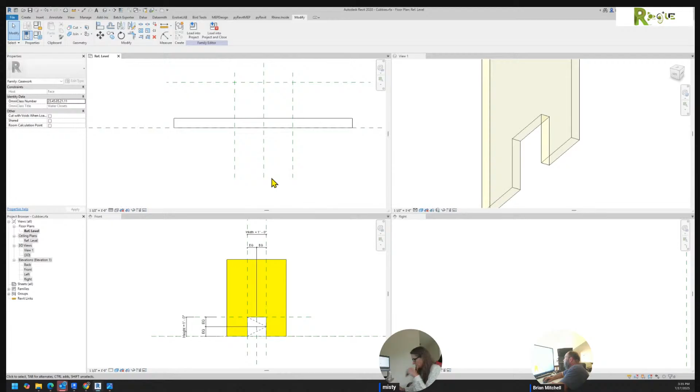Okay, now if I open that door single - just so I'm not completely, because I will get this all twisted in my head - this is not supposed to have any of that stuff. And it's going to probably be something more like 6 foot by 6 foot. The swing angle can go away.

I like the depth calculated. All right. Delete that, delete that. This should really be the depth calculated. Oh, you can't have a minus number. So this should really be the depth - that would make sense. Then we would see that we're removing so much.

Now, that can be a real frustration. My cutting object just got bigger than my property. So right now, I'm just going to make this 1. How did it change both of those? Height 1 by 1.

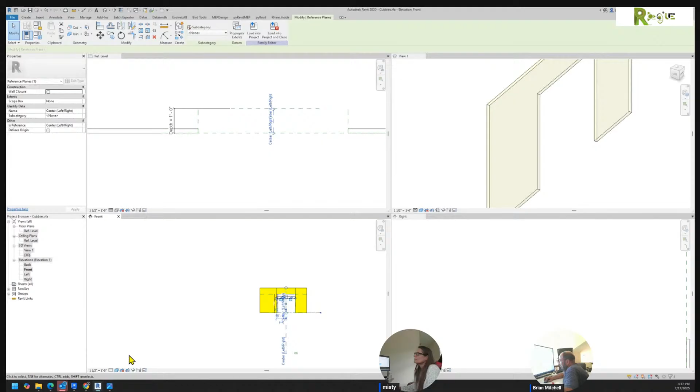Maximize 3D extents does absolutely nothing. I think I see why - because these are not to their home values, that's why. I hope I'm not chasing my tail on a dead end. See that guy right there? It's been turned into a 2D, that's why the maximized 3D extents didn't seem to have any effect.

See, that makes a heck of a lot more sense. What about up top? Yep, those are good, those are good. Yep, they all appear to be good. What about this one? Yep, that one's bad.

See, if I say - because you can see those dots are somewhere, who the heck knows where - but by maximizing the 3D extents, we should now see that dot's right down there, right there. That turned it into a 3D point, and that turned it into a 3D point.

What about this one here? Did it do the same thing? Nope, that was the one I created. All right, so my question becomes, if we don't cut this wall with this object, okay?

That is my front face. So now what I want to do is push that other door, that door single, into there. That's him.

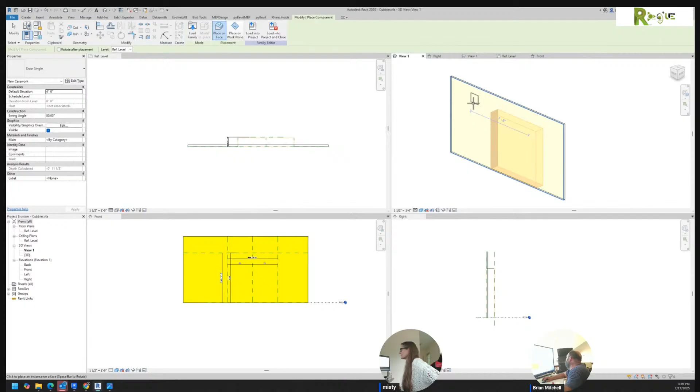And I don't like it - it was like I was moving around and then all of a sudden it went to the right angle, and I don't understand why.

All right, that's not terrible. So what I'm going to do is get those grid lines. This is my little trick for making all your grid lines much better. I'm going to go basically around that area.

Finish with a simple extrusion. I'm going to go way up here, down below a little bit. I'm going to pick everything in this view, everything in this view. I'm not even going to worry about the filter. I'm just going to hover over one of my reference planes or level lines and say maximize.

All right, so now what I want to do is put this guy in. And we want to array it, because you're seeing it's cutting it. But I might need to get rid of the cut. That might be what's causing that problem.

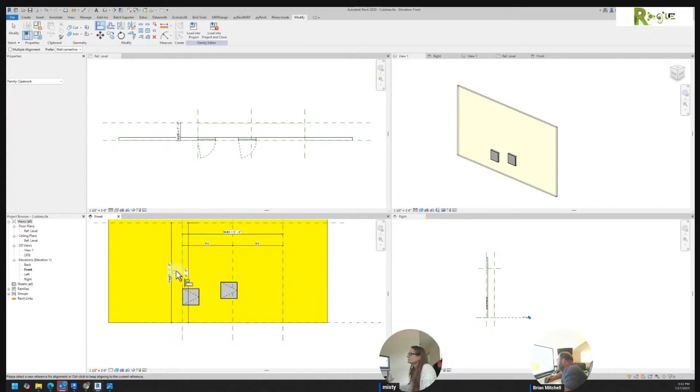I'm not even going to lock any more than that down. I'm going to change my width and see if this thing breaks. No, it did not break. Wow, this could be good. This could be good.

This is where it was breaking before, in the horizontal count. If I wanted to put 3 in, okay, not breaking.

So if I put another one of them things in there, let's see, that's under casework - this door single. Why am I naming this parametric?

So what you're going to see is if I change - this is why I'm naming it parametric - right here, I want its width to be equal to the width. No, I want its width to be a new one. That's going to be the cubby width.

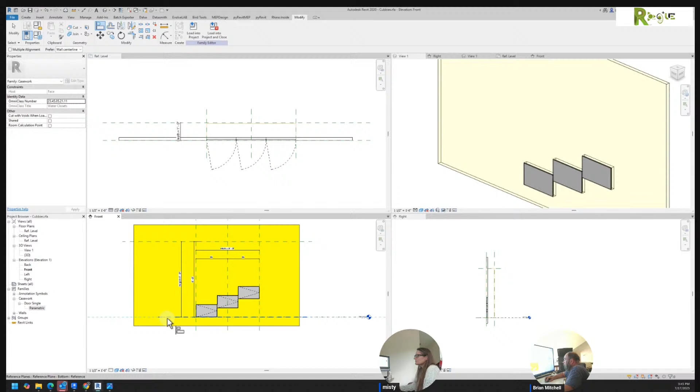See, so now what should happen is I should be able to change the horizontal count to be 4 of these objects. And these objects - it must have been because it was shared or something bizarre.

Neat part is, if we edit this group, pick this object, say that it's a 4 - gives me a perfect time to put the material on it. Right? So now you know you need a 4, now how bold are we going to go?

We're going to call that the cubbies, because that might be the cubbies vertical and then the cubbies horizontal. We'll see. But I really did think that I was able to get this by doing an array.

So this becomes the count vertical. So you can understand why that fella who gave the presentation thinks the same thing I thought for a long time - that you couldn't build this double array. Oh, you can't. Sure enough, you can't.

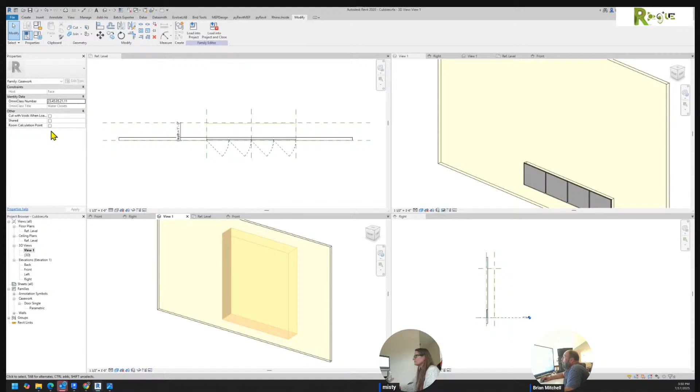So if we take this guy, which is Cubby's horizontal, and load him into the Cubby's... where's that 3D view at? Must be this one. Oh boy. You see what I see? It did cut that object. That could be really awesome.

Yep, he saved me a bunch of time, I can tell you that. See, because now all we want to do is array in this direction. Right?

Ooh, buddy, why is that group so big? Not sure. This should be count vertical. Count vertical.

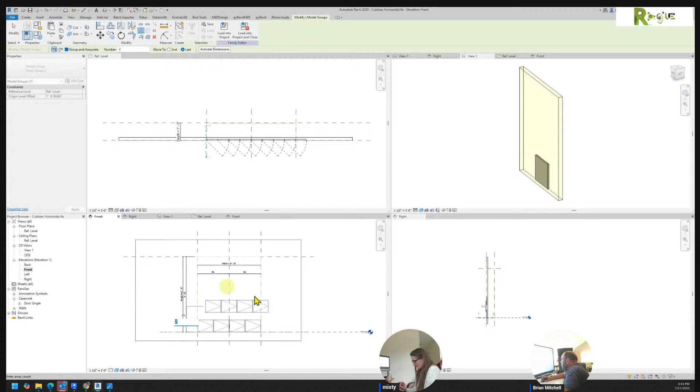Let's see. If we come back to here, so these are no longer all cutting. Can we grab this group? Can we array? No longer going to give me that nasty warning. Can I then take this and align that array? Ha ha ha, so you can do it all in one.

And then this becomes... I know I added this a second ago, but I added it to the other spot. So I was right.

Without that... oh, oh, why did it have that problem? It shouldn't have been a problem.

All right, so we just want to get rid of that array and do what he said. Son of a gun, I would not have thought that was the case. I still wonder what the heck this box is going to.

Oh, I know what that box is going to. Watch this. If I take this guy way down here and I pull this actually just a little bit above and a little bit below, it's the size of that overall object.

If I load that into my cubby's horizontal and overwrite and load that into my cubby's, I think that group will become much smaller, and hopefully it shouldn't mess up. Nope, didn't become much smaller.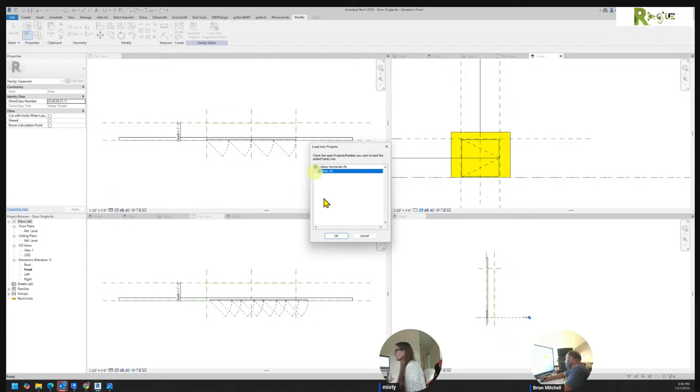This would go into the cubbies horizontal. Right. This, oh, that means that really it would be a good idea. This is the one that was causing that problem. But just for giggles, I'm going to set that to be the insertion point.

And load that in the cubbies. Go to this front view. All right, so this guy here, we're also going to get rid of this. And we're actually going to say the height is going to be 1 foot.

And then the cubby, which is this door single, don't know which one, I think it was the parametric, right? Its height is going to be equal to the height, not the cubby width, but the actual height. Okay, let's see what that does.

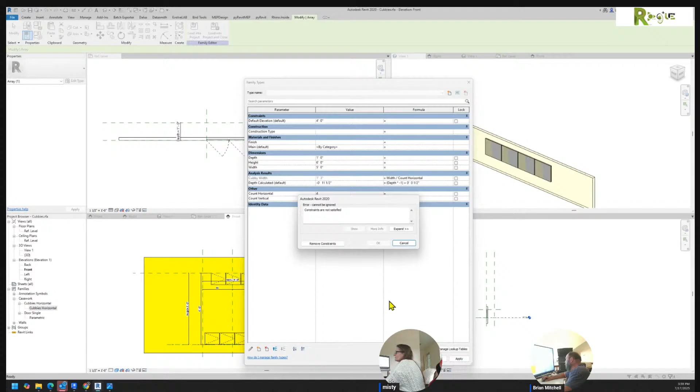You know what you could do? An old ancient trick I had, where you don't lock the two like that. What you do is you say from this reference plane to here is actually the cubby height. All right, so we're going to say add a parameter, and this is going to be the cubby height. Now the question is, can you make that be 1? And you can. All right, so you can't do the double reference planes like he was thinking.

Now, means that we need to do that array as a second. And I do remember a long time ago, we're talking more than a decade ago, of finding that out. So yes, I always have to test it. Does that mean back here in this front row, in this guy here? Okay, that's the front row.

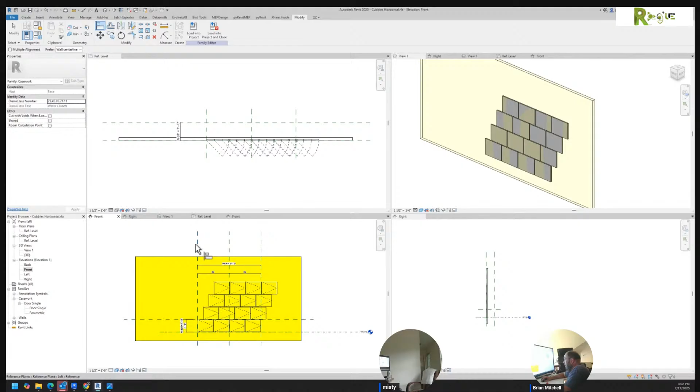Okay. See, so when you do that, theory says you should be able to, no, yeah, I guess I could take any one of those and lock that. So the question becomes, can you put 4? And the answer is yes. Okay, so this is the one that I'm telling you, he didn't think you could do. We could align this. In other words, this is not using that nested family, but you have to use one. You could do the one as last, but you have to do the other one as to the second object. Okay?

We want to change this guy to be the cubby height. Cubby. If you can name a reference plane and a parameter the same thing, Control C. We want to take this guy, make a new parameter called the cubby height. Right? Which means we should no longer need this one. We're just going to use this guy all at once. Okay? So really,

we should have this, which we know is going to be named. You know what? I don't think that's naming that one. I think that's naming the next one that I'm about to put in. That's why I keep naming this thing twice. I didn't even think about that before. All right, so this is actually going to be the height. Not that, that one. And this guy should be named, the height is 5 foot. 5 foot. Yeah.

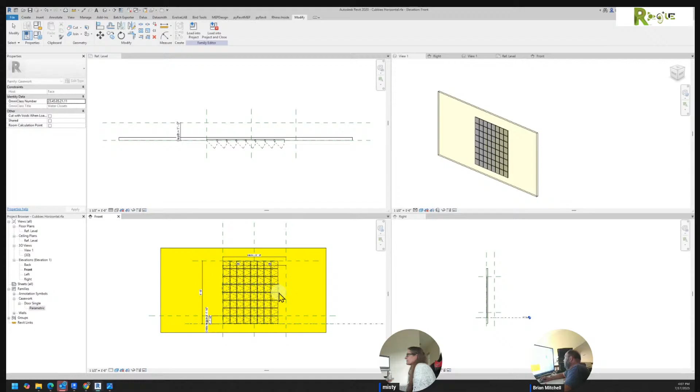It's where he's locking it down to the two ends is a bad idea. Watch this, I bet this one works. Come on. Yes. So the whole reason he thinks he needs that nested array in order to do a bidirectional and two-directional array is because he's using the last. That was his mistake. That is crazy. So that simply means that since, and ironically, you would think that it would be difficult, but all we're going to do is basically redo this.

Okay, but we've already done all the hard math behind it, so it's not as bad as you would think. Watch this. Okay. Do we have that width? We did calculate that width, right? All right, so here's where they went wrong. We need to put that door in.

I wonder why now it's rotated around. No, it's not rotated around. Oh, that's where I put the insertion point. So that's actually good.

All right, so all you should have to do is not do those arrays to last. Ironically, that would be the one thing. Array, just do your arrays to second. Okay, so we know this one. This one's going to be our horizontal count.

Lock this. See, because then you're locking to the same edge, I think is what I found out. The conclusion I came up with, right? And locking that one, and then you can lock this guy as well.

This is where he was going off. You don't want to use the align command. You want to use that calculated number. So this is the cubby width. Look at that, it worked.

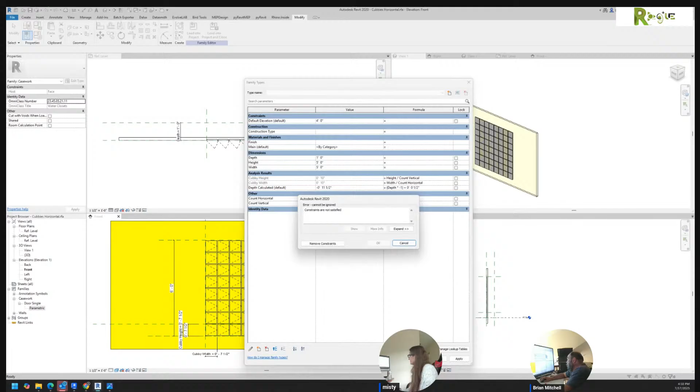Now, will this array work? Can I adjust this array? Well, let's try it - a second ago I was able to do it in the one, but not the other. So we're going to go 6 by 6, and you're going to see, yep, no problem. Oh, we have to do it in the 2.

You do have to do it in the 2. All right, I swear I got that to work at one time, but it does not appear to work now. So if we delete this, take this guy and ungroup it, take this guy, make it be equal to the cubby width.

I had some stuff in here about cubby height. I'm going to remove that. Cubby vertical, remove that. Say okay. It means that I can now make this be the height.

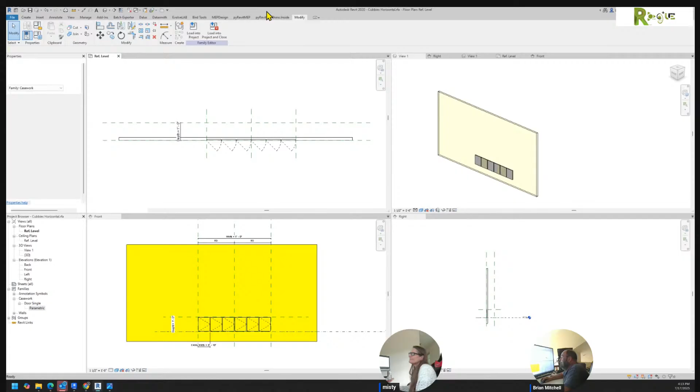All right, so the one that's named cubbies, we get to do it again. We're going to delete that. We're going to load this into it, the cubbies. Go to a 3D view where I can put it in.

Take my cubbies horizontal and I drop it in. Go to the front view of that. It looks like this. We're going to simply do an array.

I guess he was right, I eat my words. This should be add parameter, count, vertical.

And I know this line, right? I know this one goes to there. This one goes to there. I know this one goes to there. And now all I want to do is say dimension from here to there.

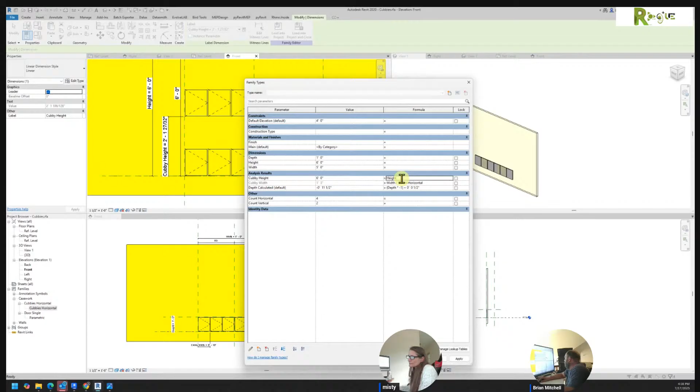So we know we want 6 feet. You just want to say Control C, Control V, divided by the vertical count. Control C, divided by Control V, say okay.

Okay, the only problem is that family, this Cubby's horizontal - we need to make the height be equal to the Cubby height, right? The depth will be equal to the depth. I mean, it really doesn't matter, does it?

Well, we could try it, it's not going to hurt anything. We'll make the depth be - we'll make the depth be equal to the depth. Yeah, the depth will be equal to the depth. The width will be equal to the width.

The Cubby width is calculated, but the Cubby count needs to go to this Cubby count. Hit OK, and it should now be working. So if you wanted this thing - wow, if we wanted 4 vertical, or 8 - actually I think this one was a 32-inch or 32 cubby. That should be 32 cubbies, 8 by 4, which you'll see, that's where we started off.

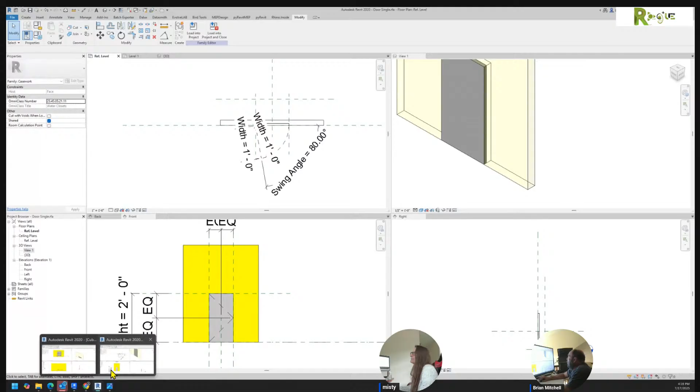What should now happen, give another copy of the Revit. All right, let's close out of that. Let's open up. So we start off with our cabinet template. Here's my idea: you start off with our cabinet template.

He's not really that great of a template, except you'll see he has the ability for me to make my own size. And this size is going to be 18 by 48 by 60. That made that shape automatically work.

Now if I take, I need to go make sure I'm saved in the other one. So this is the cubbies, we want to save it. We want to see how bad he's become in size. He's only 576 KB, not what I was thinking. I would have thought that would have been a lot more.

Everyone says be careful of the arrays. Do we take him? We're going to continue because we're just going to load it into that project. That was all I was trying to do.

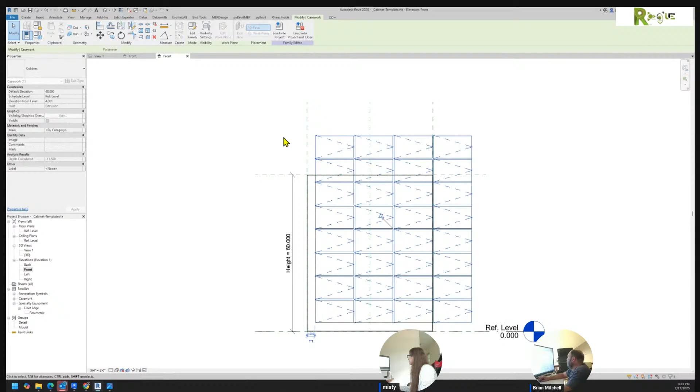Now we're going to find that we can relate the width of this to what's called the length in my project, because of the designation this company's using. The depth should go to the depth, and the height, where normally we would take it to the height, he's not going to quite be the height. So let's see what happens.

Boom, boom, lock. So if this thing was 60 inches, and I come over here and I look at this and I say 60 inches, look, there's 12 inches up from the bottom. I could do a formula that did that, but I have the ability to just go here and say 60 minus 12 is 48. And it's got the right amount of cubbies.

What I now need to do is put in the hardware on top of that, fix the material, and do a little bit more detail. But most importantly, we're going to have a cubbies template that we can quickly adjust.

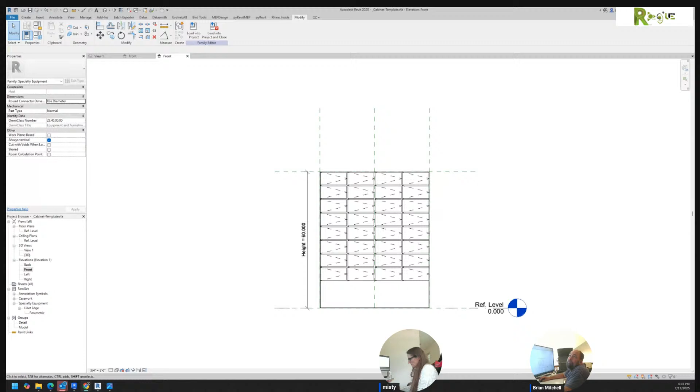I'm going to have to put this little back object on here, which isn't big. Theoretically, let me see if I can find the Raytech, see what that thing looks like. And that's this one here. Let's see, 2596.

Not exactly sure what that lock is, but I'm going to draw the hinge on there. I'm going to draw that lock, and I'm going to poke these perforations in that door skin. Get the materials working. I'm not drawing all these fine lines, but I think that should be enough to capture its essence.

I would hope that what you'd understand is this is where it gets a little bit challenging. Let's see, this is my cabinet template. So what I want to do is save this file, save as family. This is my cabinet template named Cubbies.

Oh, I already had one. We're going to call it Dash Cubbies. How about that? I'm trying to rename it there. I'm just so dumb. Dash Cubbies.